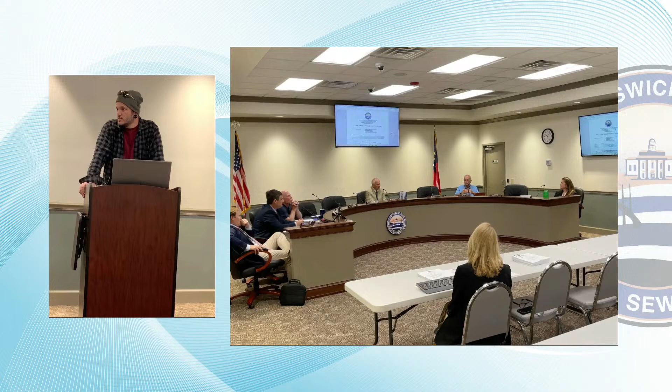We'll put together something and canvass the neighborhood for you. For you to do a canvass to get interest, everybody's gonna ask how much it costs to tie in, so we would have to send something that gives the neighbors some idea of what tying in would cost. Ms. Adina, if you could just make sure we have both individuals' contact info.

We'll put some estimates together for y'all to work from as far as talking with the rest of the neighborhood. And on our end, we'll look at an estimate for sewering in different areas, and that would help us out a lot.

Obviously, depending on where you're at in the neighborhood, your system may drain better or worse depending on where the water goes. So if we could get addresses that are interested, there may be areas that make sense to sewer because of the amount of interest on, say, one or two streets versus the whole neighborhood. Yes, sir, that makes sense.

And yeah, please reach out to me, let me know. Like I said, I'm so desperate at this point.

We understand, and you did real well on your presentation. Thank you very much. If I can go door to door, if that would help, I will go door to door and ask everyone.

I know that the only fee people would incur would be the tie-in fee, is that correct? Yes, the city would pay for the installation of sewer, and if people wanted to tie in, they would pay the tie-in fee, if the project works out. A rough estimate I think Mr. Ransom gave me was around $2,000. Yeah, something like that, that's in the ballpark. I'd pay 10 times that.

So all of this will be presented when we start the canvassing, and then once we get everything together and y'all have interest, we can come out and do one of your HOA meetings and discuss with everybody. Okay, that'd be great. And then I can make a neighborhood Facebook post and let everybody know, as many people that could show up to that meeting as possible would be awesome.

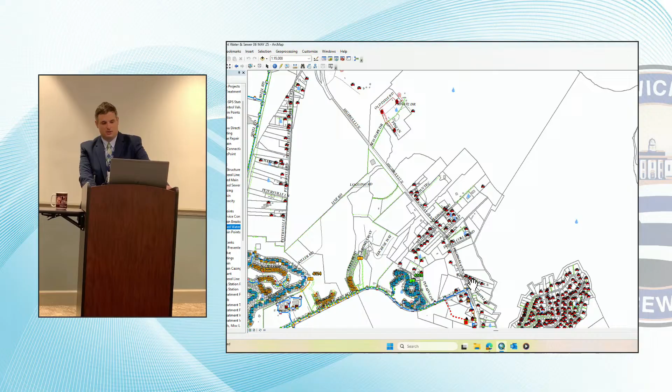So this will open up water availability for the entirety of northeast Glynn County, south of the new roundabout at 99.

I've got a couple of questions. What are they going to do with the existing oxidation pond they've got there? As far as I know, those will be discontinued and they'll just use the existing pump station on site. There's a pump station on site now that the flow drains to, and they will use that existing pump station with perhaps some upgrades necessary for that pump station to pump the distance required.

EPD's going to be pretty, I mean, they want those ponds to be eliminated. Yes, sir, I think they'll be very excited for that opportunity. But the New Hope people are going to do it? Yes, that will be the responsibility of the developer. That's not included in this? Not included in this, no, sir. The agreement is solely for the 12-inch water main from New Hope down to Driggers.

I just don't want that to be a future issue for us to have to work on those ponds. Understood. There's an on-site treatment system with existing small wells and a gravity system out there, they go to an oxidation pond that, once they get onto our system, would be no longer in use, so they would have to decommission those. It has zero flow right now too.

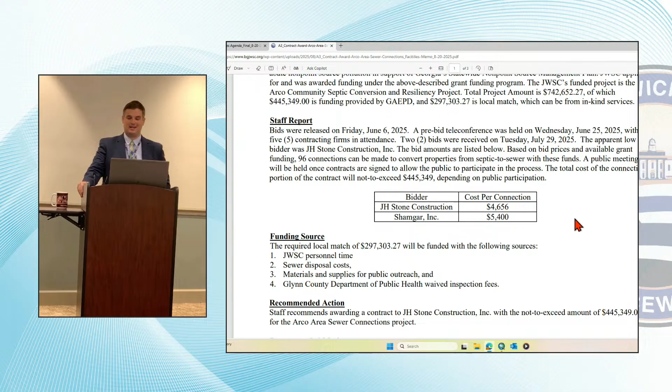J.H. Stone Construction, we've met with them. What they've requested is that if this is awarded and we move forward, they would like to get groups of 25 at a time so they can go out there and hit them in bunches. So what we'll do is hold a public meeting, gauge interest, and see if we can get enough people signed up, and we'll release 25 at a time, preferably also if we could get a bunch of them on one street so they could be in one area. But right now, the plan is for the 96 to be first come, first served on the connections.

As far as our funding match, it can be in-kind, so we're doing personnel time for the administrative time necessary to produce the work. We're also going to be doing some sampling to prove that the project is reducing non-point source pollution in the area. We will be using our vac trucks to actually dispose of the septic tank material left in the tank.

The contractor will be decommissioning the tank, but we'll be disposing of the sewer that is in there. And then Glynn County Public Health has agreed to waive their septic tank decommissioning inspection fees to help with the match as well.

So this is going to be first come, first serve, regardless of who and what you are? Well, that would be ultimately up to the board if they would like to put a different policy in place.

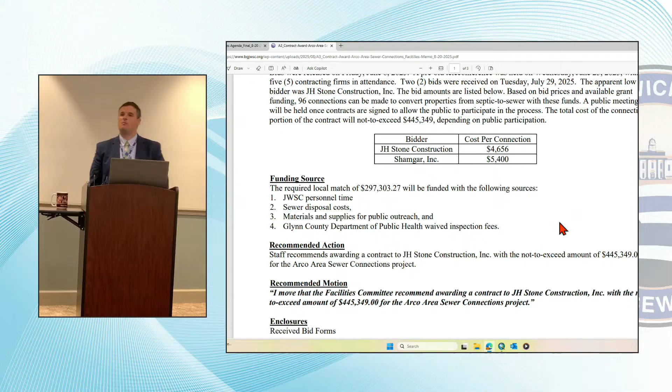I'm just kind of afraid that all these renters are gonna... the owners aren't the people who own the house. It's all renters. A lot of Arco is rentals. We have been compiling a list of what appears to be owner occupied versus rental, but we don't know for sure.

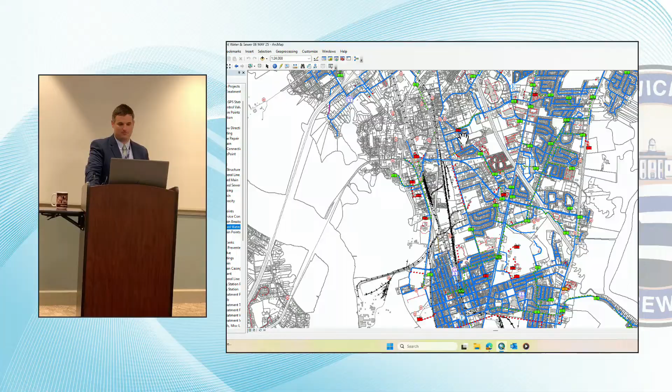Can you pull up a map of Arco? So this is the Arco area here. So the project, if you recall, was essentially from Fifth Street north to Knight Avenue, from 341 to Whitlock, or the railroad tracks beside Whitlock, I guess is a better way of saying that. Let me turn the water lines off so it's not so crowded.

These orange lines here, the reason they're still orange is because we're waiting on the record drawings, but that is active sewer. So all these orange lines here, and the grant funding is required to be used in this area.

So how many people have tied on? A dozen or so far, something in that neighborhood. No more than that. We got a half dozen or so on the Brunswick-Glynn side and about a dozen in Arco thus far.

But obviously, if they could get the connections done without having to come out of cash up front, I don't think we'll have any problems getting people connected out there.

This won't apply to Brunswick Village. This will not, this is strictly for the area at Arco. We'll be able to apply for one for Brunswick. We can apply for future funds, assuming this goes smoothly, for other areas as this comes about.

Yes, sir, we would actually love this to be a rolling program as we expand our sewer system to these previously unserved areas.

Like I said, if this is approved and we move forward and get a contract signed with J.H. Stone, we will hold a meeting in the area to gauge interest. Mr. Stone will be there as well, so we can make sure everybody knows the contractor and we don't have people misrepresenting the situation out there.

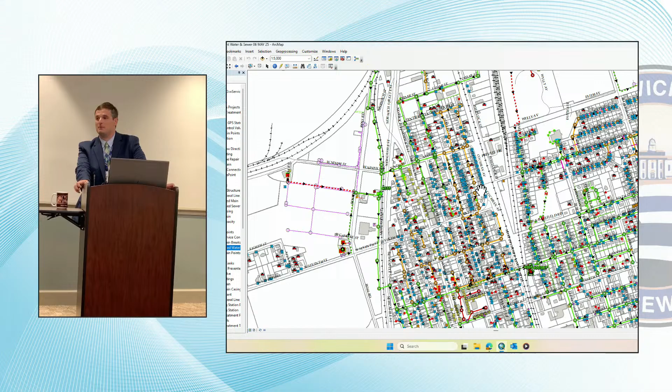Do some of those people have problems like the Bell Point area? A lot of those folks have problems like Bell Point, yes, sir. But some of them don't? Well, I haven't spoken to everyone out there, but I know that if you walk those back alleyways, your feet will squish.

Okay, so it'd be hard to prioritize just them. Yeah, it's not necessarily a prioritizing thing here as much as the whole areas of need.

So on the financing option for them, are we looking at, do they have to have a credit check to get the financing? No. But are we looking at how well they have paid their bill, staying current with their water bill? Has that been a criteria? That has not been a criteria for adding in there yet. Obviously, we do have people that have increased deposit amounts due to failed payment histories.

And we could look at increasing the deposit amount a little bit more as well to help with that. I'm not saying we necessarily want to, just saying it's something we need to consider, because if they're not paying the water bill, they're not gonna pay the fine.

I think the math on, I don't remember the exact dollar value, but I think the math on the current financing rates, if you finance it for the longest period, is like $12 a month for 7 years to get that paid off.

It's very reasonable for them to get on the system, since a lot of these folks are telling us they're having to have their septic tank pumped every 2 to 3 months, which is $250 to $300 every 3 months. So they'll come out ahead. We're all for helping all we can.

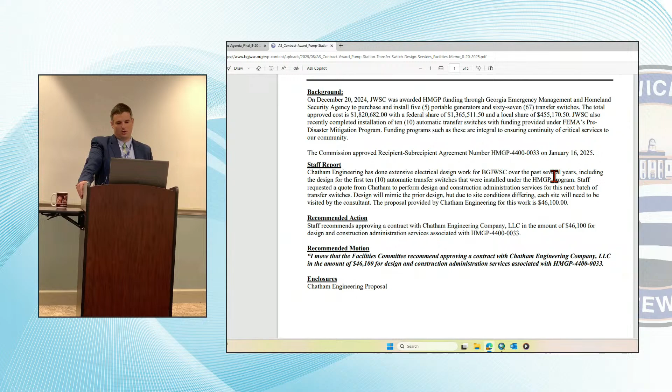We approved what is known as the recipient-subrecipient agreement on January 16th. This is a design contract with Chatham Engineering, who did the design on the first phase, which will include sizing and layout for the new 67 transfer switches, including site visits for each one to confirm details. It'll be about a week of site work for them to visit all these locations, and then they will also perform construction inspection for us. Total cost for Chatham Engineering is $46,100 to complete this work.

The proposal includes bidding assistance and construction administration, and they've allowed for 5 trips so they can do them in smaller batches of 15 to 20 at a time. Mr. Chairman, I move that the Facilities Committee recommend approving a contract with Chatham Engineering in the amount of $46,100 for design and construction administration services associated with HMGP 4400-0033. Second. Are there any questions? I will say, of the 10 we have on site, having helped hook generators up, it takes longer to back the generator into the actual lift station than it does to hook them up.

So it cuts about an hour off of the process having these in there for every one of them. If you think over a 3 or 4 day period, that is a substantial amount of savings during a storm event. It repays us very quickly when we do that.

I have one question - do we have a time period that we have to get this done? There is on the FEMA side, but do you remember the date on this one? May of 26 - no, that's the other one, that's the generator install. We'll get you that date.

Well, we want to make sure, because if the engineer takes too long to get it done, that could be a problem. But y'all feel comfortable we got plenty of time? Yes, sir. Any other questions? Hearing none, all in favor? Motion carries 3-0. Thank you, Andrew.

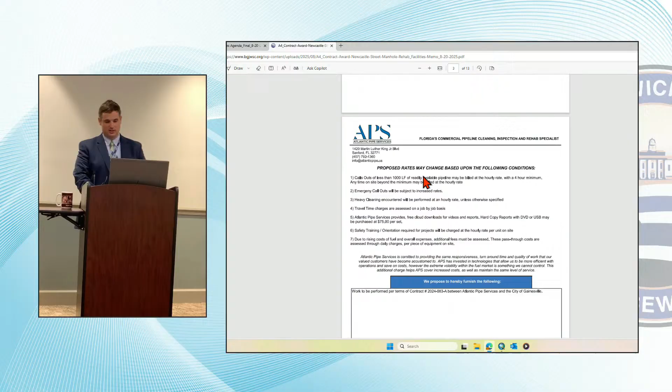So the request - and you can look at the proposals that are attached - Atlantic Pipe actually has 2 separate proposals that were added together because it's a different business unit for them that does the lining versus the manhole rehab work. But Bio-Nomic is included as one proposal. So the recommendation is to award this contract to Bio-Nomic Services.

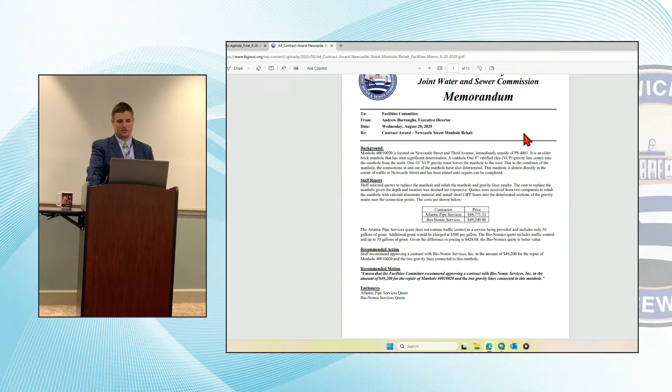They have done extensive work for us in the past, and this is a very key location for us, and we are getting substantial I&I in through that manhole at this point. They did all of the work when we were at 4002, yes sir, and they've done an extensive amount of manhole rehab work for us as well. We used to have an annual contract with them. We did, yes sir. Did we stop having that? We haven't had one in the last couple of years. We need to get back on that for manhole rehab. All right.

Have a motion? I move that Facilities Committee recommend approving a contract with Bio-Nomic Services in the amount of $49,200 for the repair of manhole 40010020 and the 2 gravity lines connected to this manhole. I second. Motion second. Any other questions? Being none, all in favor? Motion carries 3-0. Thank you.

Next item is Dunbar Creek Water Pollution Control Rehab, Mr. Burroughs. Yes sir, this is a change order to the Dunbar Creek rehab contract, but is not a change order in the traditional sense. We had a gravity line between the mechanical bar screen and the grit removal system - there's a bar screen, it goes in the ground for a very short period.

Can I interrupt you? Can you pull that drawing up so we can see what we're talking about, a picture of it or something like that? Let me see what I can track down here. Well, let's try the other one. Okay, who knows? That's not what I need. If you can't find that, can you just Google it so we can see where it is in the plant? Yes sir, and zoom in on that a little bit? Yes sir. All right, so right here, let me zoom in here. Focus it there when you zoom in.

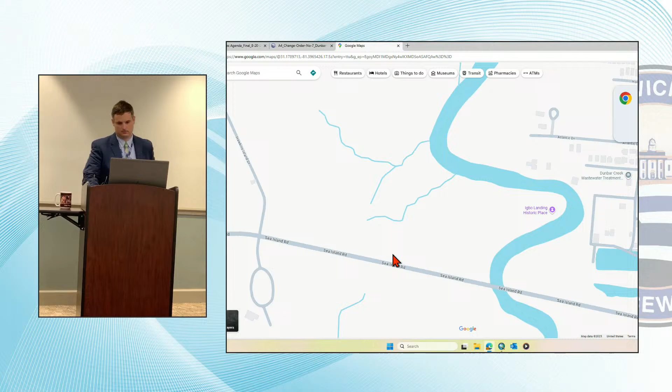This was updated last year during construction. The mechanical bar screens are right here, where the channel comes in. There's a short gap before you reach another concrete structure that holds the grit system and the influent Parshall flume.

The line collapsed between the bar screen and the grit system, and the concrete was severely deteriorated. When this happened, BRW was already on site working at the plant, and we were able to put the flow through an old manual bar screen.

It is as exciting as it sounds. The flow goes through a manual bar screen, and somebody sits out there all night with a rake, pulling debris off the bar screen as it clogs up and throwing it away. We did that for 4 to 6 weeks while we were getting this done.

They also installed bypass pumps out of this upstream structure for high flow situations. BRW was able to come in, and this gives you a better idea here.

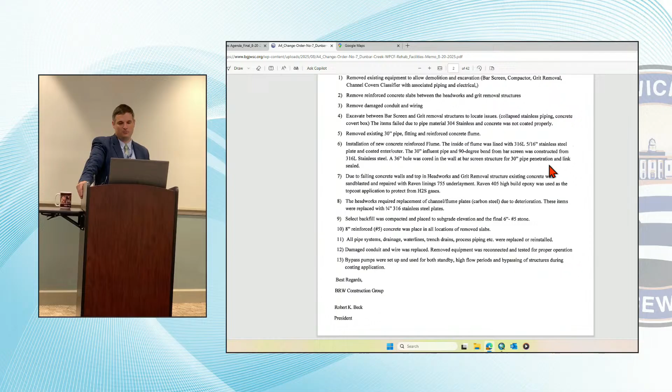They removed all the existing equipment and slabs necessary to get down to it, installed a new 30-inch concrete reinforced flume with 316 stainless inside of the flume, recoated the entire grit structure with an epoxy coating to protect the concrete using Raven high build epoxy, and then replaced all the equipment, putting things back in service.

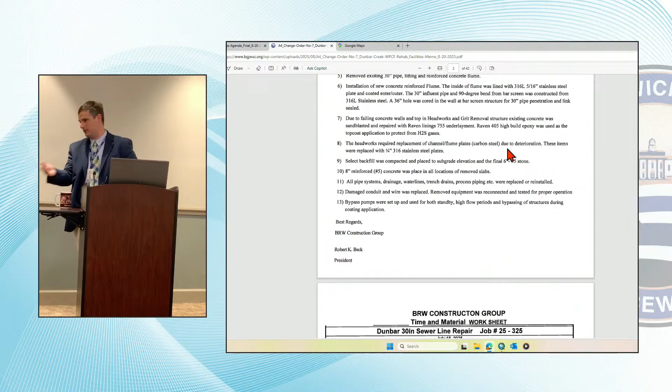The bypass pumping, even though it wasn't running for the extended period since flow went through the manual bar screen except during high flow, was rented equipment for the duration of the project. They have their timesheets in accordance with the design build contract and the markups as necessary. The total cost for the work was

$393,090.39. This will technically be change order number 7 to the contract. It was not planned in the contract as a change order, obviously, but this was for emergency repairs. And I will note, it is doing wonderfully now.

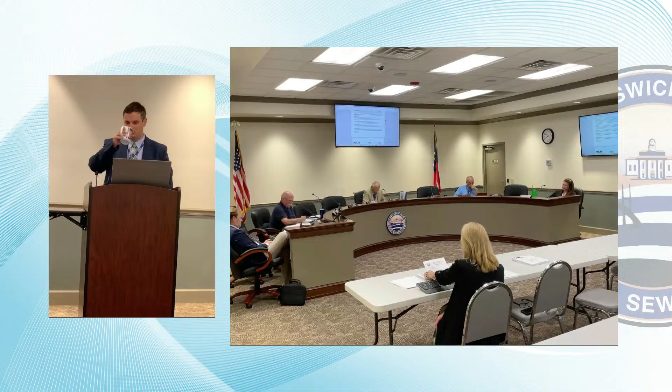I have one. Andrew, what else do we need to do at that headworks to make sure we don't have backups in the neighborhood? At this point, there's no reason we should have backups in the neighborhood right now. All the influent pumps have been replaced, all the VFDs have been replaced. We're working on an additional fail-safe so that if the VFDs or the SCADA were to go out, it will run on floats, and that's being put in now.

So we've got, never say never, but we've got 4 or 5 different fail-safes in place now to hopefully prevent that from occurring. We have now replaced the 30-inch influent line from the splitter box, the influent wet wells, all the way back through the headworks, so that's all new line now because all of them have collapsed in the last 3 years. We do need to look at lining the section of pipe from Sea Island Road into the plant — that may be a project we need to do in the very near future.

Well, that line will be smoke tested, won't it? That line will be smoke tested. Yes, sir, that will be smoke tested. Well, yes, sir, it should be. I don't want to commit — it should be. It will or it won't. My goal is to have it smoke tested.

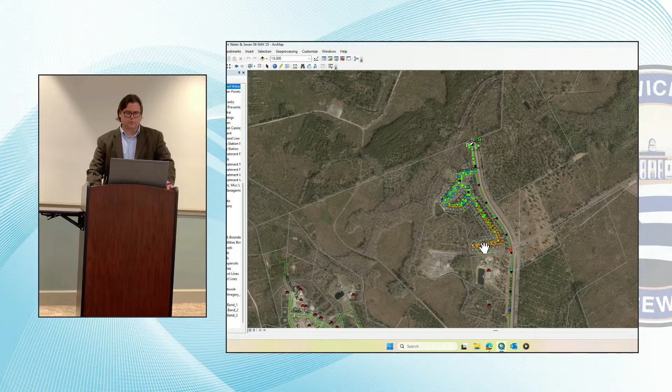Let me show very quickly where this is. We go a little bit to the south, State Route 99 and Golden Isles Parkway, across 99 heading north. This is almost to the very end of the roadway at present, next to our pump station 4134. Woodland Cove subdivision is a residential subdivision, and the infrastructure in orange indicates it is still proposed or under construction, ownership not determined as of yet, and this is the portion we're talking about now.

This infrastructure is actually water, about 740 linear feet of 8-inch PVC, and sewer, gravity sewer, almost 660 linear feet of 8-inch gravity sewer and manhole appurtenances. This infrastructure will add about 20 new customers to our rolls.

On the sewer, you need to add in an 8-inch - it does not say that. Yes sir, in ours, we will do that. It's listed as, it's not listed as 8-inch on the dedication as well, but it is 8-inch.

And out at that end, we are ready for the school to start construction, and we don't have any - we're discussing, there's a lot of proposed developments. We do need to increase the pumps at the one downstream pump station for sure, that shouldn't be that big of a deal. We do have a major job to do along Highway 99 though.

And just FYI, DOT is starting the roundabout at the Spur and 99 intersection. Well, that ought to be fun. Yeah, and they're calling it temporary because the long-term plan is to 4-lane 99 from 341 to 17, but this is going in immediately to alleviate that dangerous traffic that we've been asking for a few years now.

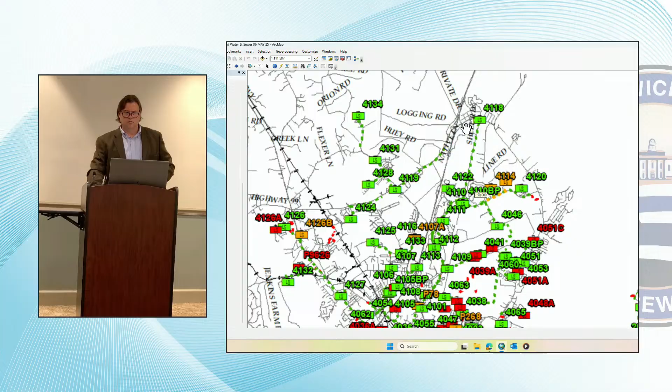A couple meetings ago, we did accept an infrastructure and easement dedication from Buc-ee's. That was for the on-site or future public right-of-way, Buc-ee's Boulevard. And then a little bit of the easement covered a little bit around our meters that are on their property. The easement we're talking about now is an easement to cover us from Buc-ee's property down to our easement that exists over the existing 12-inch gravity sewer that they tie into.

This is from a separate adjacent property owner, Brunswick Highway 99 LLC, and the Buc-ee's team did reach out and facilitate this easement for the Joint Water and Sewer Commission. This covers us legally from Buc-ee's property all the way to our existing easement. So we didn't have the easement before they put that work in? Not until now, if the board chooses to accept this easement. But the sewer's in. Sewer is in, flowing.

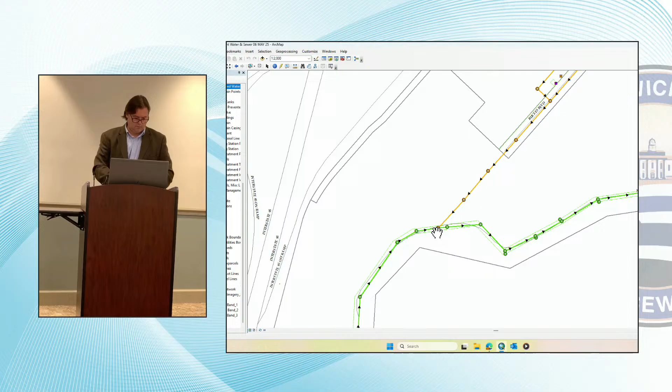Was that Danny, what's his name's property behind Buc-ee's? That group - not sure, State Route 99, or Brunswick Highway 99 LLC. I'm not sure, but that's them. So they're the ones that worked with Buc-ee's to bring Buc-ee's here. Oh wow, yeah, looking at signature blocks - Martin McDonald, I can't, yeah, Mark McDonald is the only one that signed, so. Huh? Is that a 20-foot easement or 40-foot? They came in, they were sort of the front people for Buc-ee's. Is it 40-foot easement or 20-foot easement? Let's see what the documents say here.

Can I have a motion? Chairman, I move that the Facilities Committee recommend the full commission approve and accept these requests to accept infrastructure and easement with associated documentation. I'll second. Motion is seconded. Any other questions? Hearing none, all in favor? Motion carries 3-0. Thank you, Commissioners.

On the Brunswick system, a couple of items to note. The Howard Coffin well was brought back online following the casing repairs that occurred - that 16 million is obviously the first usage we've had in several months there following the repair. You'll notice a substantial reduction in Goodyear Park - that's a twofold reason: bringing Howard Coffin online helped, but we also lost a well motor out there. That motor has been replaced and Goodyear Park is back online.

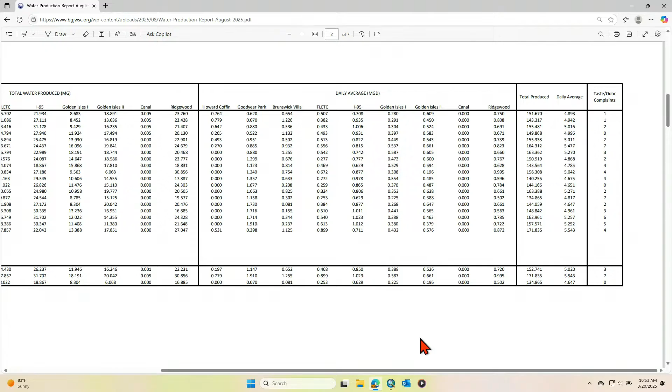With Howard Coffin offline for half the month and Goodyear Park having a motor issue, Brunswick Villa picked up the slack, so hopefully that number will drop back into the prior range going into next month. The Brunswick system did 5.5 million gallons a day, and as we'll get to in the project report, we're getting very close to starting up the Canal Road well, which should help smooth out some of the spikes we see across the area.

Do we know what the unaccounted for is for that system? We don't have those numbers exactly - we're updating all of those. We have to take all the meters and keep them updated on the filters that pull that data, so we're working through the process of tagging them to the individual systems. It's not complicated, but if you have to do it 32,000 times, it takes a minute. But if you look at our graph, it's very similar to where we've been.

You see the spikes going up in the summer. It'll be interesting next month to see the report, because as we all know it's been excessively wet for the last two and a half weeks. We'll see how much of that usage has been outdoor usage, because if it is a lot of outdoor usage, we should see a substantial drop in the month of August.

St. Simons for the month, 3.6 million gallons a day. For July, as expected, a lot of outdoor usage and a substantial amount of tourism on the island - you can definitely tell when the tourist season begins on St. Simons, the flow goes up beginning in March and April, continuing up until roughly September or October. So we've reached the peak of the water season, but all in all, that system held up pretty well for the month, at 112 million gallons for the month at St. Simons Island.

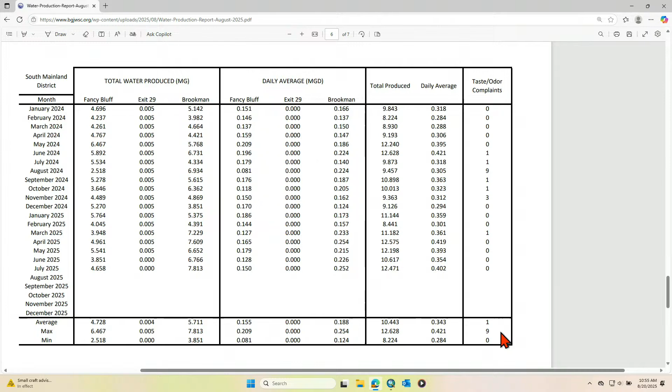On the taste and odor complaints we got for the month, most were associated with the mainland and St. Simons due to increased usage. We had some dirty water complaints as a result of the increased usage. That does tend to happen - the more usage, the more scouring of the lines, we'll get a few more debris particles that break loose. We have to go flush the system a little bit more.

Move the wastewater now. Yes, sir. These numbers are going to look very different next month.

So the Academy Creek for the month, all right, we got it - 6.8 million gallons for the month.

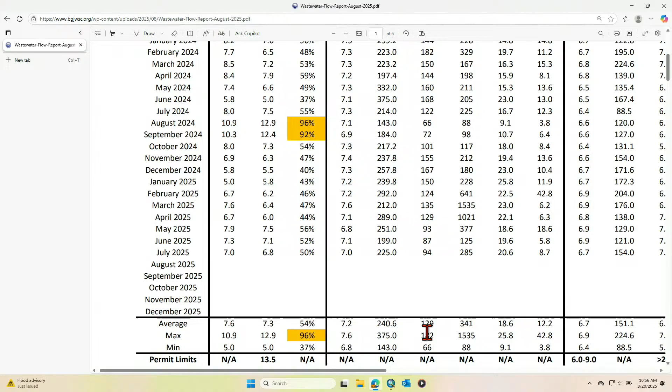We do have, continue to have, the ammonia issues, which we'll talk about when we go through the project report. We're starting to see tremendous progress on that this month following some completion of work on the project. We got 96% BOD removal and 99% TSS removal. The BOD removal, 96%, not too bad considering the influent BOD was less than 100 coming into the head of the plant. So doing well there.

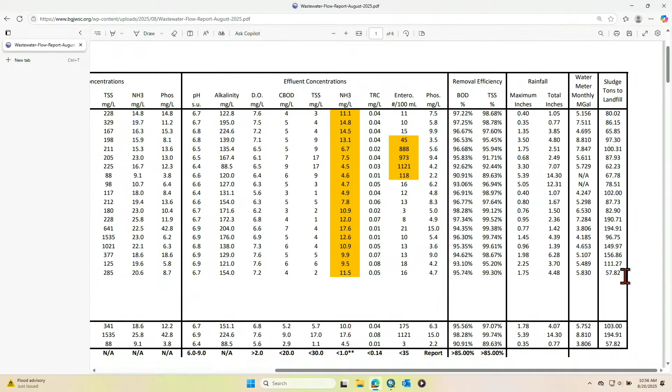We did have a little bit of reduction in sludge for the month. That was mostly due to improved solids handling, and we also had some slight issues with the belt press, so that number will go back up a little bit more for the month of August, most likely. But like I said, next month's numbers will be higher than that.

I think month to date, we're averaging somewhere around 11 MGD at Academy with all the rain we've had.

We found 2 manhole covers that have been knocked off in the past week and a half, so hopefully we're catching a few of these problems out there. One of them was in a ditch that we knew we had a problem when we started finding live snakes in the wet well - they had washed themselves into the wet well in the ditch.

Still alive? Still alive, rocking and rolling. We didn't see them, not sure if they went through the pump or not, but I suspect they did.

All right, Dunbar Creek for the month, 3.5 million gallons a day. Plant rocking along very well, 98% BOD, 97% TSS removal. That plant, following the upgrades, is just operating quite effectively out there. Well done by our staff, and certainly appreciative to our contractor for the good work they've done out there in the past couple of years to get that plant back where it needs to be at. Flows are elevated for the month at Dunbar, but not ratio-wise, not near to the level Academy is right now.

What's the status of our permit application to increase the permit? We got some comments back from EPD that have been routed through the engineer to respond to. And as we'll go through on the project report, pump skids for the chemical treatment system are supposed to be delivered the first week of September.

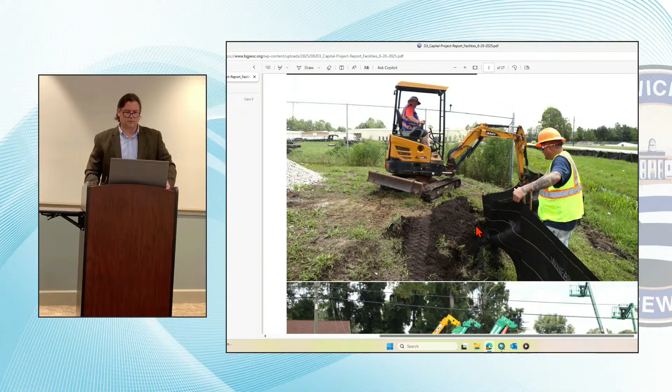Get some silt fence installed out there. If you've gone out there, in that area, across from the Sunbelt area and whatnot, you'll see some pipe stockpiled. Does anybody notice anything particular about the pipe? Right across the plate, Chairman.

8-inch and 6-inch — that pipe is blue on my picture. There's an 8-inch and 6-inch water main pipe there. So we are installing 6-inch where it makes sense to install 6-inch. Gotta get the tape measure out. Anyway, sorry, I had to point that out.

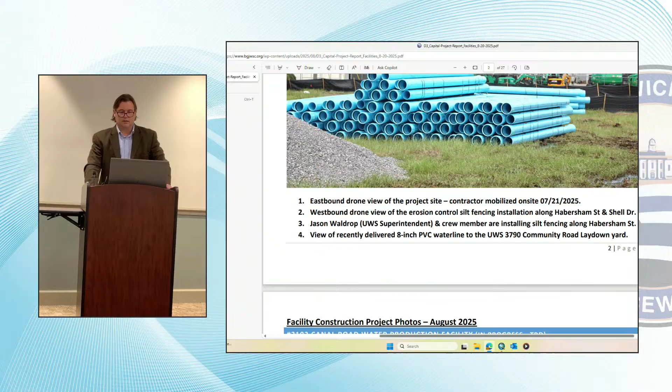What is the cost savings between 6 and 8? Hardly anything, sir, minimal. Exceedingly minimal. That has been a topic of discussion here in these chambers in the past, so I enjoyed pointing it out. UWS is our contractor, and they're moving along out there with the water install.

Next project is the Canal Road Water Production Facility. It's essentially complete — substantial completion inspection and walkthrough has been done. We are just waiting on a few little items to deal with before we get the thing online.

What is it that we're lacking to put it online? Last thing I was told was there's something on the alarming side for chemical feed. The chemical feed systems are working, but you have to have 24/7 monitoring if the alarms aren't working, or somebody's got to stand there the whole time. So we're trying to make sure the chemical feed alarms are working the way they need to work.

When this is started, we won't have to use the Miocene wells as much? It should help reduce the load on the Miocene wells, yes sir, particularly on Golden Isles 1 out there. That could be turned back.

Well, are they working on the stuff, finishing it? Yes, sir. Sometimes at the end of projects, it's the most difficult time to complete, and getting these things done and complete, but they are working on these.

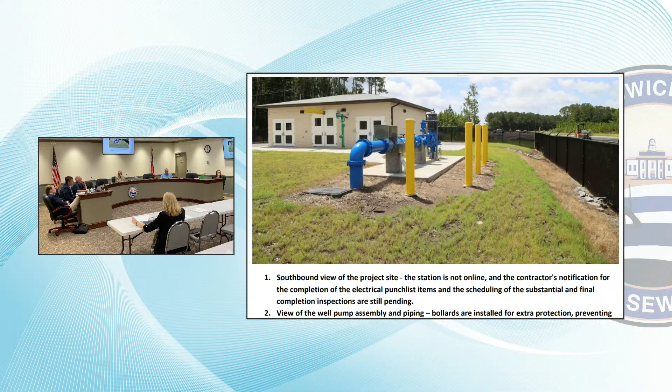They will have to re-disinfect everything — the storage tank, all the water in there, is going to have to be dechlorinated, of course, for our good friends across the street at EPD. Haven't paid them everything, no, sir. So we're retaining a large enough retainer.

Yes, 5%. So I would suggest that the slower it is to wrap up a project, the higher the retainage we require on them. I think state law limits us on what we can do on retainage to 5% now — that's all we can do.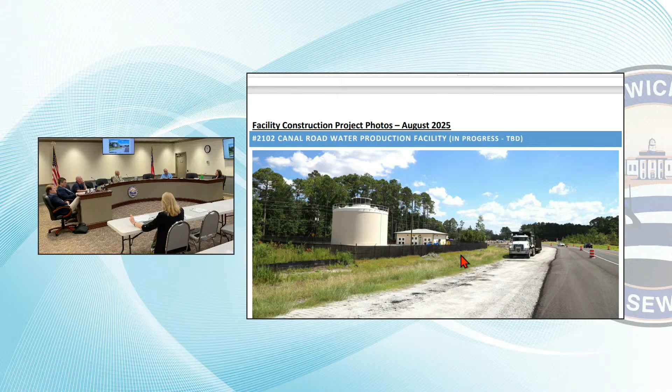It's substantial dollars waiting on a dime out here, so you'd think somebody would push to finish. Yeah, or their next project is cash flowing so much better that they don't want to assign labor to this one. We'll talk about their next project here in just a second.

But great project — the facility is fantastic. It's going to be a really, really good asset for the joint water system and our customers in that area. And in the background, you can see Glynn County is progressing nicely.

I understand they were pulling the ditches to final elevations, bottom elevations, this week. Big ditch between our bollards and the road, right? There is — a pretty deep ditch. It's deeper now, and significant; you'd have to be doing some serious speed, a Dukes of Hazzard effort, to get up into our well there, but the bollards are there just in case.

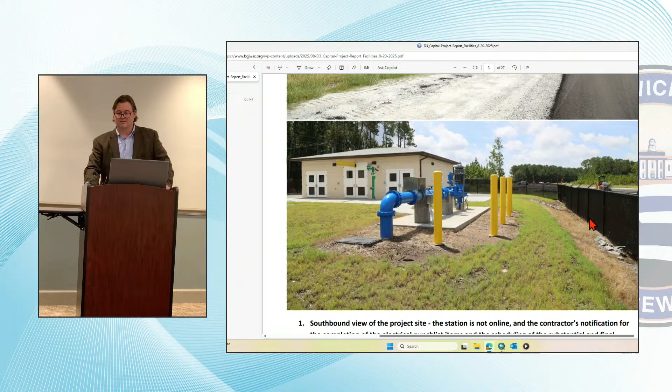What's the speed limit on that road? As fast as you can go — or that was mine, I don't know. Right now it's very slow, but it'll be 45.

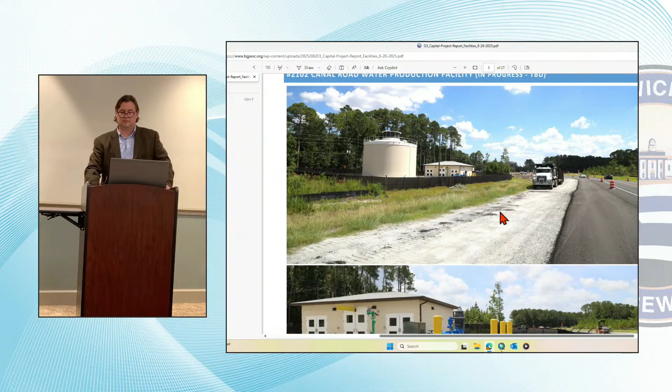Not that anybody drives that, given the opportunity, but should we paint something on that tank — a logo? Is there a logo on it? There is no logo on the ground storage tank; we don't have logos on any of our current ground storage tanks. But this one's pretty visible. Yeah, I think it's quite a beautiful thing there, but it's a busy road, isn't it, Wayne? Very busy. I'll supply a picture if you want.

GICA did ask if we'd put their logo on the tank - Golden Isles College and Career Academy. It's out there off of Glencoe. Glynn County might have an interest in the North Glen Park too. We told them we've never painted anything on the ground storage tanks before, but if that's something the board's interested in, we can certainly take a look at that.

This one has high visibility. They're supposed to reroute traffic one more time, hopefully this week, not early next week, getting ready to wrap up the roundabout. A lot of good stuff happening in that area.

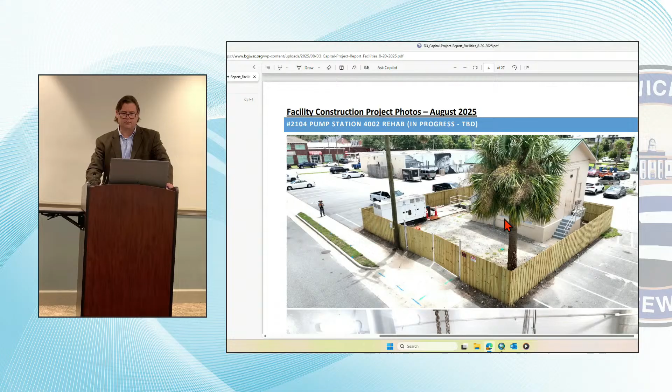Next project is our group of 3 pump stations. This is a picture of 4002 downtown close to Mansfield Street. The fencing is all around it now. Substantial completion is done on these 3 pump stations, and we're looking to close these out very quickly.

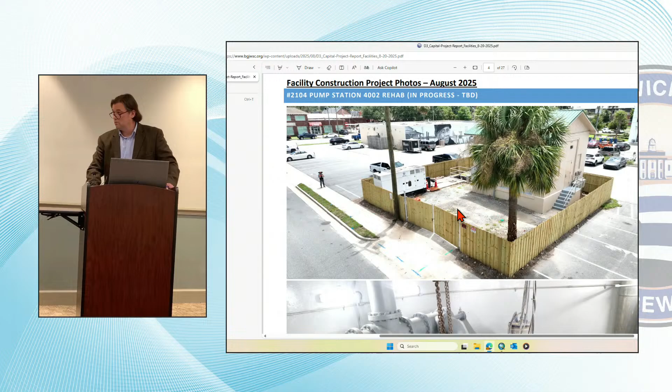Pumps down at the bottom, a little extra painting the contractor did. The asphalt repair they did out at the Altama connection is as smooth as any I've ever seen. Here at 44 is the paving on the connector. Thank you for saying that, I will pass it along.

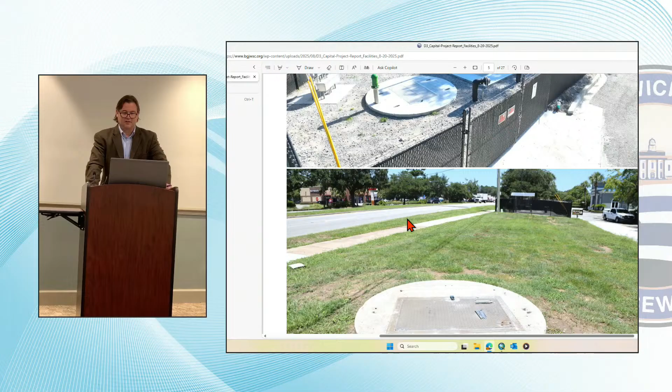4044, formerly known as Payless Pump Station - maybe always known as that - is again substantially complete. Looking to finalize that and get the final payment made on this one. Very good project.

How often do we pressure wash our tanks? I know we did it a few years ago. There's no current schedule, but it is something we need to work on.

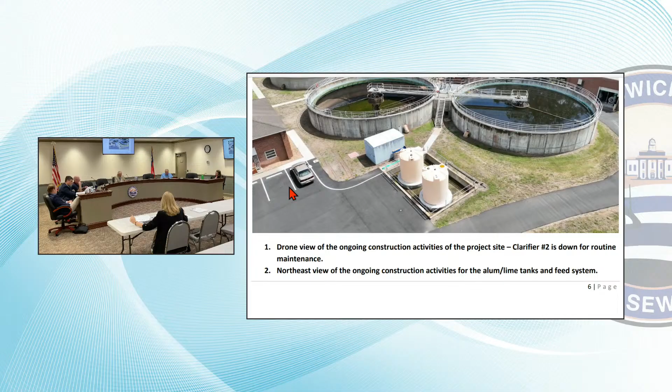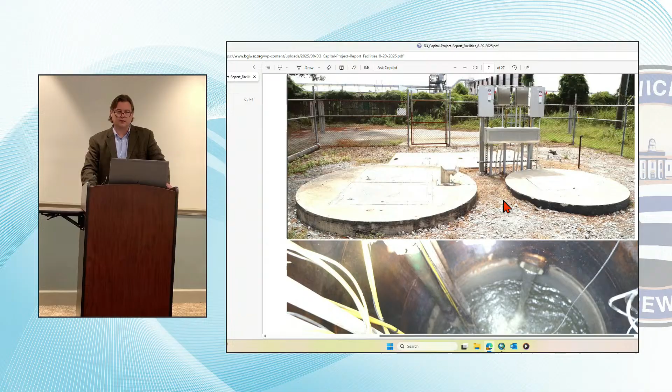The project itself didn't include any improvements to the gravity lines or anything like that in its scope. It had primarily been downscoped to electrical, per the master plan's indications of need.

Highway 17 North Pump Station - again, another one we're closing out, substantial completion inspection complete. That's an overview shot. You can also see a good section of our neighbor to the east, the US 17 widening project. Looks like they got some tackifier down in the ditches for erosion control purposes, I'm sure, bleeding off their road.

We're not close to the right of way there, are we? There's a good ditch between us and the right of way, but actually the right of way is here - that's the right of way line.

All the disturbed area you see there is DOT right of way. Another good picture looking to the north.

That's a pump station that we designed. And it works? Of course it does—we've heard no complaints on the station thus far. It looks really good, thank you. We'll pass that along to the team. Big improvement for that neighborhood.

Can we still call it the chicken coop? You can call it whatever you want, sir. Version 2—all right, the chicken palace. We'll call it the chicken palace.

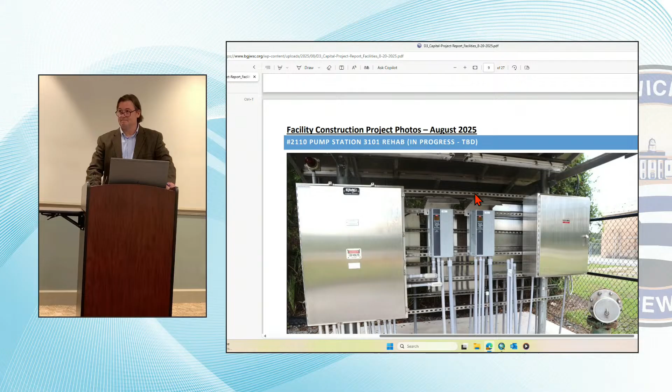Todd, you can do a talk at GAWP about replacing pump stations—show the before and after. I think we did a pretty good job on this one.

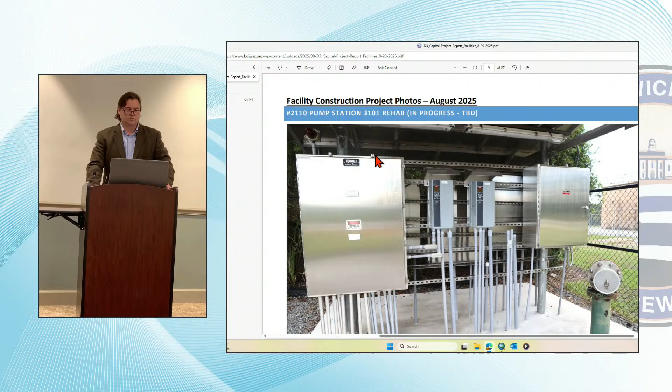Pump station 3101, the third of the group of three, right there. Good shot of the new panel array.

Looking back to the north from that site, the RV park is in the background. The cable that was formerly draped across is gone. I think that's probably one of the greatest achievements of this rehab—getting that cable out of there. It took a lot of effort, and for one of our staff members it was a particular point of emphasis to get that cable removed. The team did a great job on that.

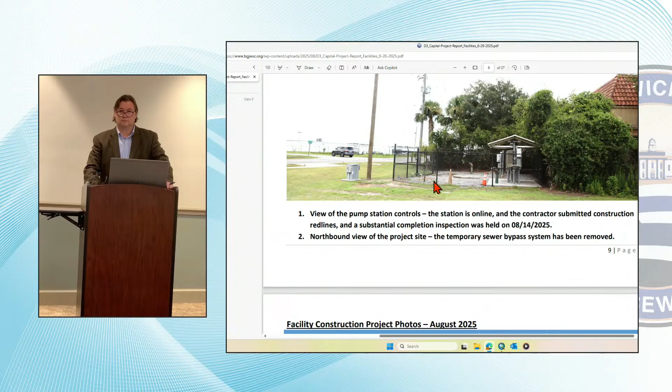I believe they actually have a little odor control down here now, don't they? We got a little bubbler installed down there. It generates air bubbles in the tank, which keeps the system oxygenated and helps eliminate odors on site. We're starting to put those in a lot more locations. Not a huge situation here, but at stations with grease issues, keeping it churned up keeps that grease from solidifying on top of the wet well. Pretty low cost installs and saves a lot of maintenance headaches down the road.

How many stations on St. Simons do we have that on? I'll have to get the exact number—6 or 8 right now—but we just ordered about 20 more. Is it the Wizard brand or something? Some of them are the Wizard, some may not be that exact name brand, but a very similar type approach.

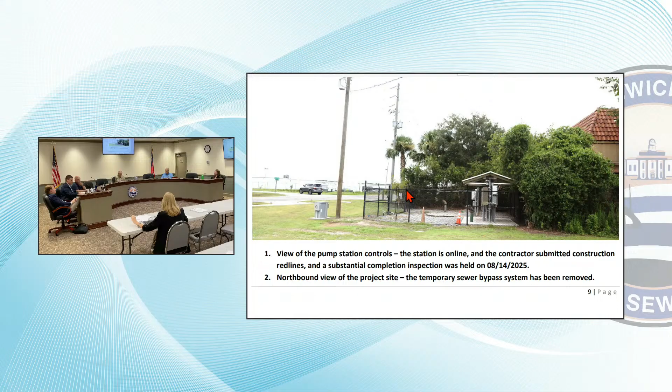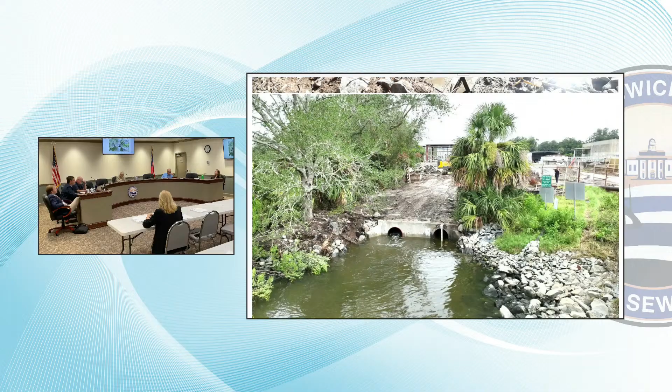You can see them constructing the new parallel outfall line and head wall there, a subcontractor for Reeves Young. The bottom picture shows the new parallel outfall line in service. A new handrail has been put up so nobody walks down there and accidentally goes over the top. That new parallel outfall line will improve flows through the plant at high flow, as well as prevent exceedingly 100-year flood flows from backing up through the plant into the new UV system.

So that is online and is being well oxygenated if you go down there at low tide—the old double barrel down there now. Come on down to the next photo.

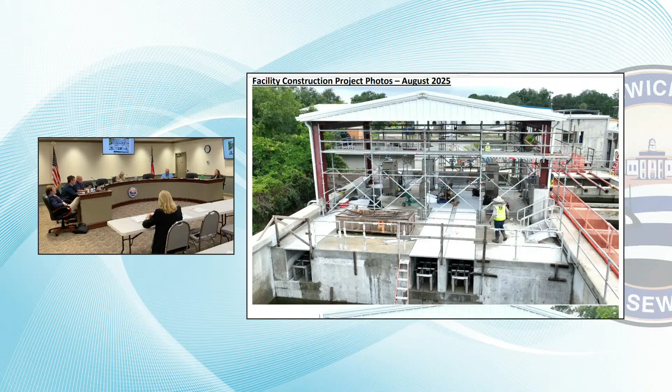That's looking back towards upstream of the process in the UV system. You can see the new serpentine weirs installed at the end of the system there below those gratings. We ended up doing solid grating over the UV channels to prevent algae growth in the areas that are exposed, which is both safer for us and prevents problems with the UV system as a result.

They are actively installing UV bulbs now—108 light bulbs to install out there, and pulling the connector cables. The hope is that those installations will be complete by the end of August. We are pushing our vendor to provide startup as soon as installation is completed. They still have to install the weir plates, bulbs, and finish all the electrical connections. Lighting has been completed under the structure, so that will be well lit. It has not been powered up yet, but the lights have been installed.

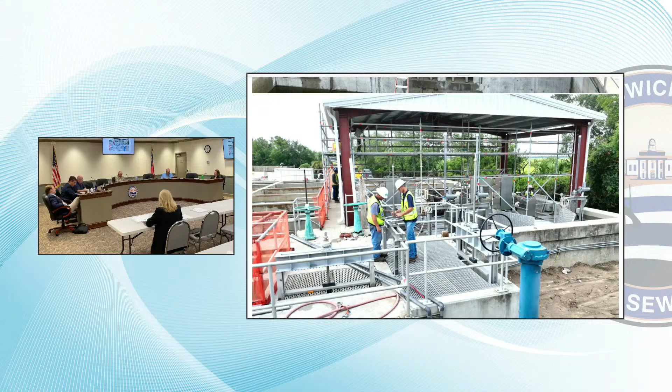You see them working on the gates there. On the back of those pictures, you may see some small actuators on those gates. There's 3 of them that run into the 3 UV channels. Those definitely need to be actuated because it takes about an hour to raise one about 6 inches right now. So we're getting those powered up so they can be actuated at this point.

Gear ratio is very, very low.

But the exciting news, if you come on down, all of the new RAS pumps are installed and functional. So the work in the RAS stations has been complete as far as the actual piping and pump replacement, electrical work. What we have to do now is pressure wash, and they're going to paint the downstairs area in the RAS stations.

Our RAS flows are approximately triple of what they were before. We're having much better control of our blankets as a result. And through 1.5 sludge ages since the new pumps have been online, we've seen the ammonia at the plant drop in half of where it was at.

So we are- can you explain what a blanket is?

A blanket, if you go into a clarifier, flow goes into the center of a clarifier and then goes out from the center in a circle. And as it goes out, the velocity slows down until sludge settles out. A sludge blanket is the depth of solids sitting at the bottom of that clarifier. The longer it sits in the bottom of the clarifier, it loses oxygen. The thicker the blanket gets, you will get anaerobic material down there, which is not great to send back through your oxygenated process as part of your RAS.

So now we've got better control over those blanket depths, which is great for both high flow events - when high flow comes in, it can push solids out if you're carrying too many - but we're also sending much higher oxygenated material back, so we're reducing the oxygen load on the plant as well. So those new pumps are performing very effectively.

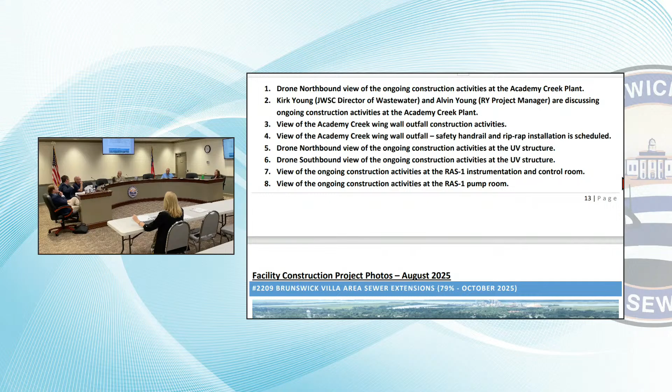So sludge age is how long you hold sludge on site. It takes about 10 days for all the sludge to actually make its way through the plant. So it doesn't sound like that, but since you send it back through, we hold about 10 days worth of sludge.

Very good, very good. Brunswick Villa area, sewer extension there. Just one road left to pave as of a day or so ago. That was the note I got this morning from Mr. Patel.

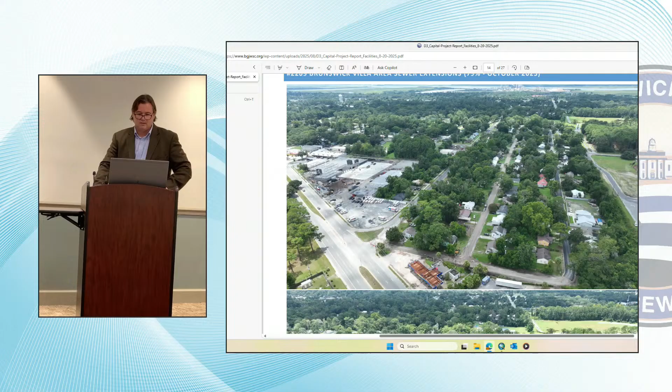So this project's rocking to a close. And like I said, indicated earlier, Mr. Patel indicated we had a half dozen or so that have already tied into the new system out there. So some of the lines already in service. All of the lines technically are able for service right now, I believe. We're just doing paving.

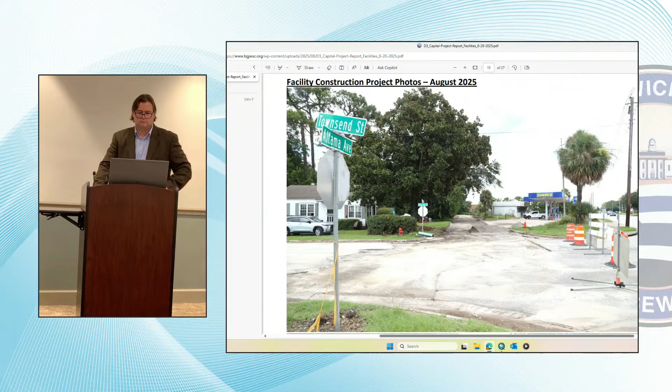All righty. Last couple shots of the pictures of the streets there. Exit 29, Division 1, which is our water production facility, utilized an existing well down there.

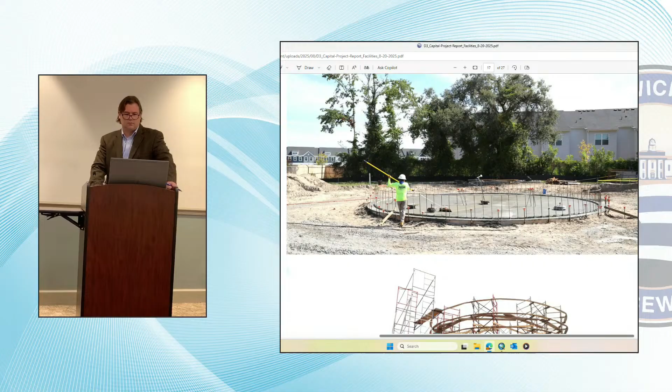This is the ground storage tank, which looks a lot different than this presently. That's just the base going in with all the piping and such. Scaffolding going up. Got their crawler that goes around so they can work on it. You can see all these stacks of tin get stacked in place, and those are basically self-contained form for the concrete. They'll go in there.

It's like a big Campbell soup can.

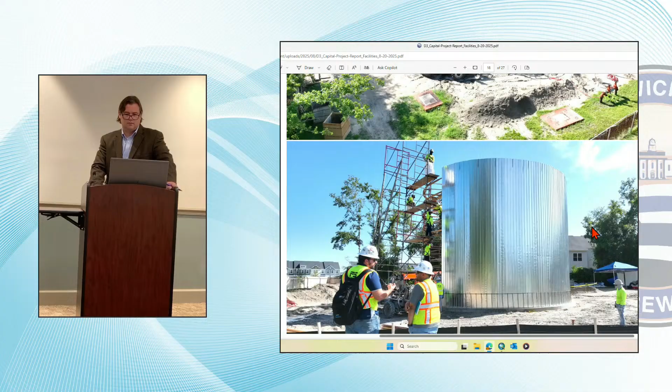It's our Petticoat-Schmitt contractor sitting there talking. Shot from above, looking downwards, with the scaffold and all that. And if you got there today, you will see how fast stuff happens. When stuff happens, it seems to happen really fast. Concrete all the way around, so you'll see on the inside.

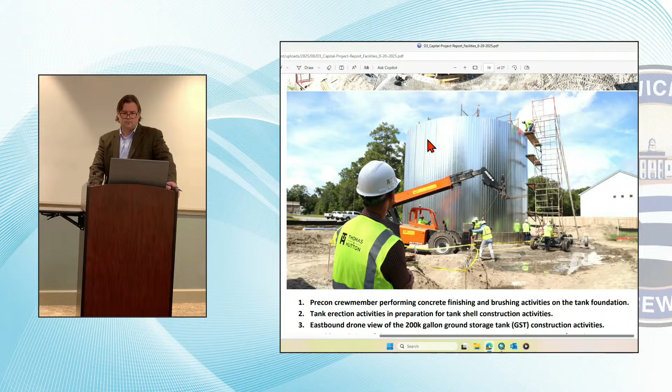There's our Thomas & Hutton representative on site, Tyler Davidic.

Exit 42 storage tank is up there. Hill Point warehouse is in the background, and Amazon is up front in the foreground. Where's the tank site? See that wet spot?

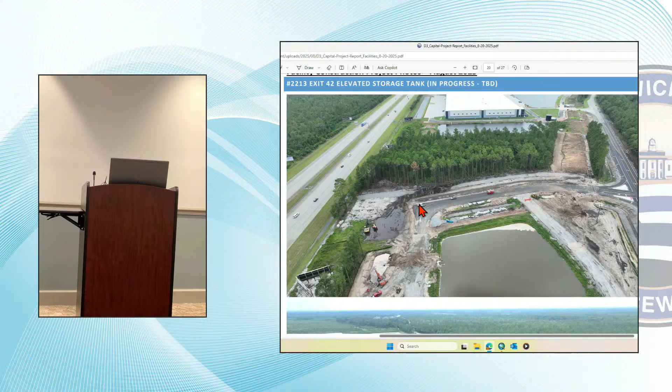Yeah, that pond area, unfortunately, is our tank site. There's a lot of water runoff that's getting cleaned up and drained out right now. That cleared white area is essentially where our tank will be, so it'll be very visible. Absolutely, very visible.

My understanding is the subcontractor has mobilized. I hadn't gotten confirmation yet, but our project manager told us they were going to mobilize yesterday. Pelley is their site civil subcontractor, and they've had equipment on site. They actually built the access roadway to the site using the construction easement our neighbors to the west, or southwest, provided us.

We are de-scoping some valve installs from the contract and installing them ourselves to avoid customer issues. We have an existing 12-inch main and a gravity main running through a 30-foot easement that comes through here, right by our tank site. Our tank is going to connect right into that 12-inch main to feed and service our system. As part of our tank contractor's contract, they were to install a T and three valves there.

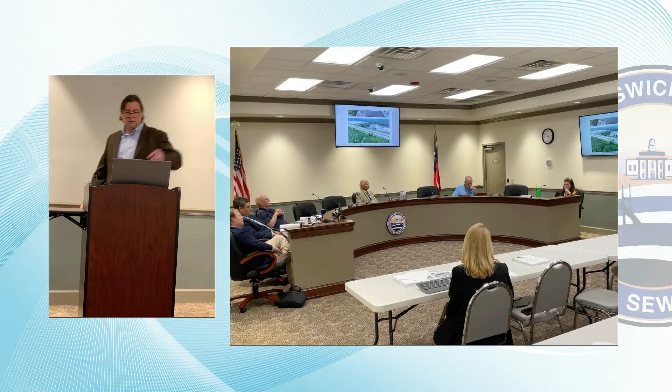The Amazon site here, Project Bruin, is connecting here, and their services are connected to that same 12-inch main. Once they're connected, we don't want to take them back out of service. Unfortunately, with timing, our tank contractor hasn't been able to get this T cut in yet. So our in-house water distribution team is going to proactively do that, so we don't have to take our Amazon customer out of service once they're tied in. Sometimes timing doesn't work out, but we have the ability, capability, and materials to do it ourselves, so we're de-scoping that out of the Phoenix tank contract.

We hope to see some action happening there. We were supposed to have some auger cast pile material delivered last week, but I think the rain probably delayed them a little bit. It would be good to stage that in the mud, so they're out doing a little site preparation.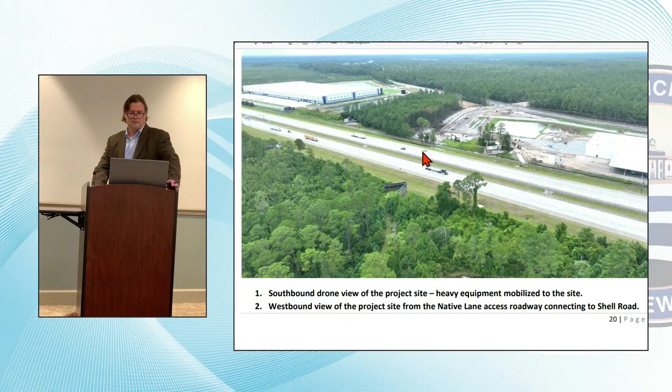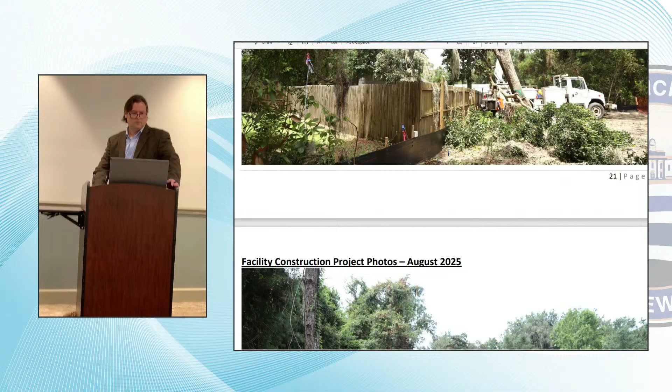Now we're talking about Division 2, our Exit 29 elevated storage tank. That's clearing going on at the tank site itself, with tree trimming for the access road and around the tank site. More good pictures of tree clearing, it's looking really good back in there. There's a little mulching activity going on, and again our Thomas & Hutton folks are on site monitoring construction.

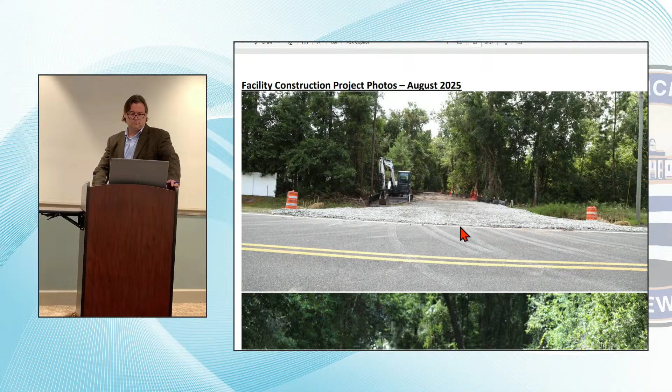That's the view of the access road from Southport Parkway. If you drive down through there, they improved it to their needs and made quite an improvement. Joint Water will benefit from that as well, though we're paying for it. Even though it may not have been in the scope of work, we're paying for it, since drainage was marginal going back through there already, so that's being taken care of as well.

Not making it any worse, I trust. With the access road, Commissioner, there wasn't much drainage there on this access road. To the north and other areas, there is some ditch work that comes off of Southport.

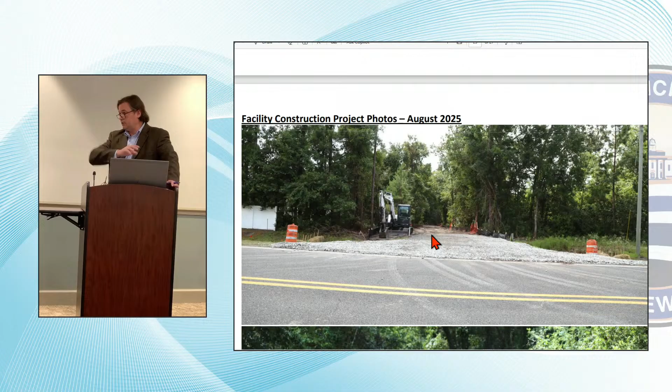I know that Glynn County personnel did use this access road as well to get back there. Let's see what it looks like real quick. Yeah, we're talking about right here. That's not a public road, is it? It is not a public road.

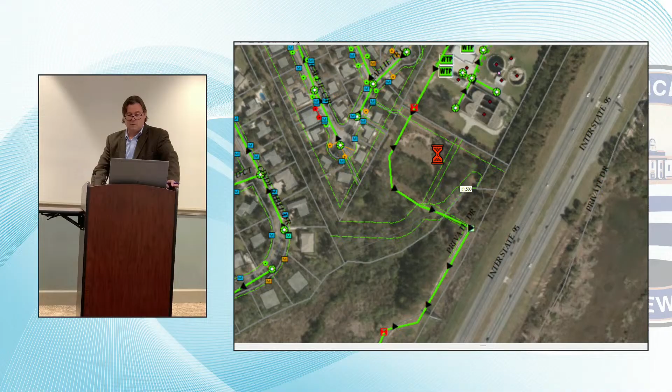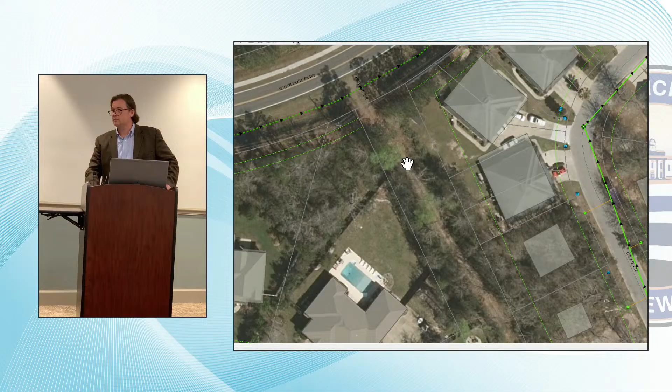Will we be putting in a fence at the top of it? I think Joint Water probably will, there was a gate there, a cattle gate. And of course, sharing the access with our partners at Glynn County, anything we put back there, they would certainly have continued access. I think even the billboard people might access this here, because there are several billboards down through here, basically where our outfall line goes from the Exit 29 treatment plant. Let's see, the tank site is essentially here.

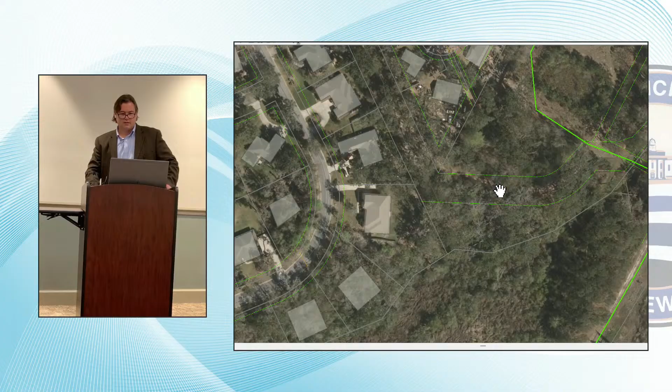They are actively installing piling out there. If you go out there now, you can drive right back, just announce who you are, and pull up safely away from the activity. Right at the end they got a porta john, park right there, you can see everything going on. Huge crane, pile driver, friction piles pushing down pre-stressed, prefab concrete.

You can see it from 95? If you look hard, you can see activity from 95, but not quite yet. There's still a lot of buffer, a lot of trees. You can see the crane for sure, it's poking up above the trees. I think the marks on the pounder are 85 feet. Pretty significant, pretty cool to see.

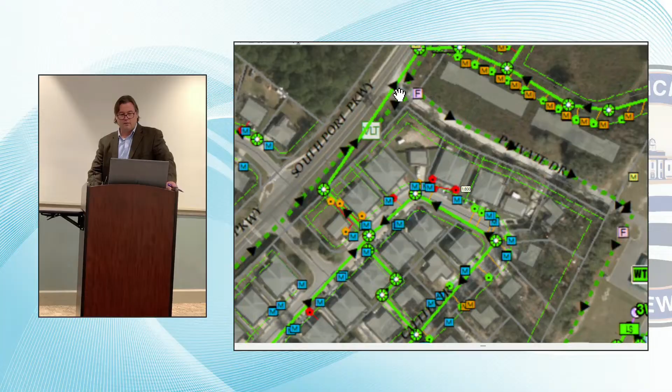Commissioner Neal, this is another access here, on the way we access our treatment plant. That wasn't where I was talking about, it was that south alley. Gotcha. Yeah, and this is something we may want to talk with Glynn County in the future about, maybe conveying. That is a Glynn County parcel actually that we use for our access. Our access road is not on our... I'll turn this off so we can see it better. The county owns this parcel here.

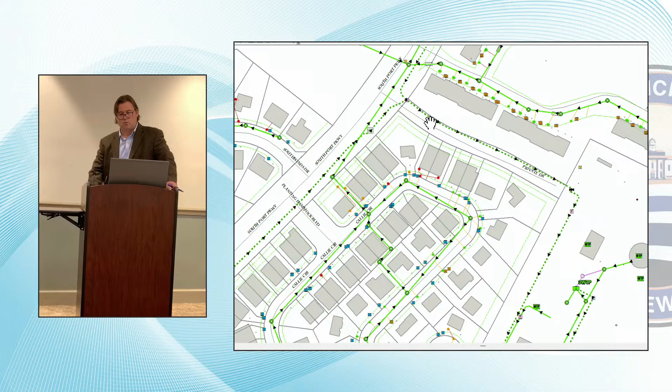Addressing a little drainage and washout issues on that road, because it is unimproved at this point.

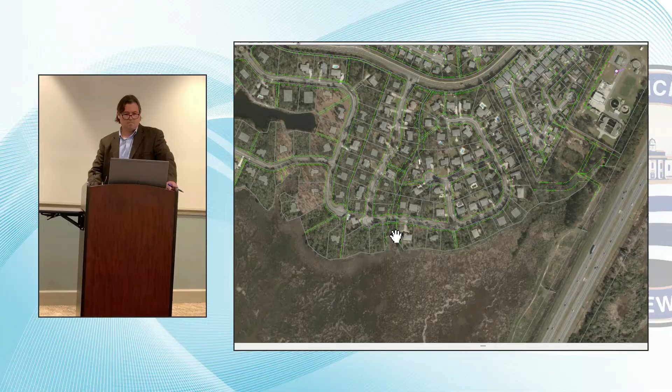Moving along down here, this is Division 3, which is the water loops, the third part of this project, and this is connecting the two subdivisions. Back here, the contractor's trying to finish up Academy and Canal Road before they mobilize down there to get the water loops done.

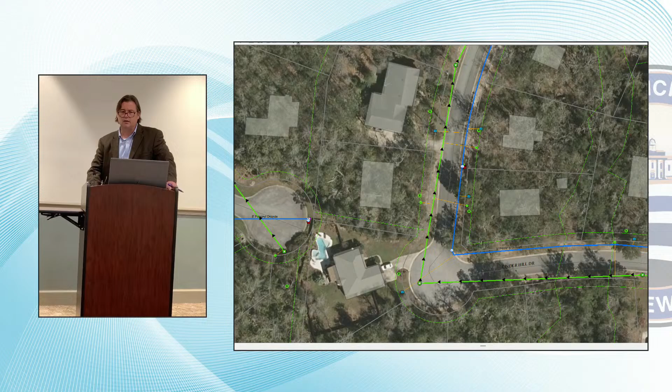Same contractor, that's it, Cinder Hill and Bartram, connecting right here across this easement that we've obtained, which nicely shows in the mapping now. Our good customer here deeded us this easement across their property, and that's how we're going to connect the two formerly segregated water systems, improving the looping and redundancy between there. Especially once that tank comes online and the new well, we should see some good improvements from there.

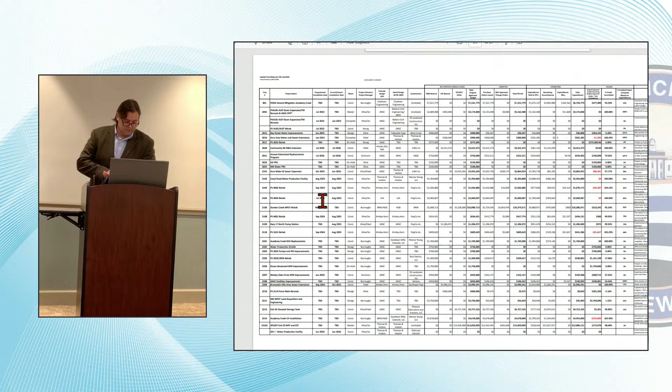That's up at Southport, looking at the crossing there, we're going to tie in, that's another one of the crossings for looping. That is the summary of the pictures, and we always do include the detail for all the projects. Pictures are just the stuff that's really kind of in motion, you might see something happening out in the field, and then the detail is for all of our named capital projects and the different stages that they are.

We'll note that we do have an RFP out for smoke testing per our discussion at the last meeting. The current plan is to smoke test about 960,000 linear feet of pipe, across all three of our systems. Bulk of that is mainland and St. Simons, with a couple basins down at exit 29 we intend to smoke test. What was selected, we pulled and set parameters for increased pumping during rain events and pulled the top 50 basins out. Of those 50 basins, we're doing 45 of them. 3 of them had no actual gravity basin to smoke test.

They were just seeing increased flow rates because the upstream basin was seeing such high flow. And 2 of them, the gravity basins were so small, it made sense for us to handle those internally. So we're doing the top 45 basins from an I&I perspective in the county. Pre-proposal call on that is tomorrow, and bids are due back in September with a hopeful recommendation for award for y'all at the September meeting.